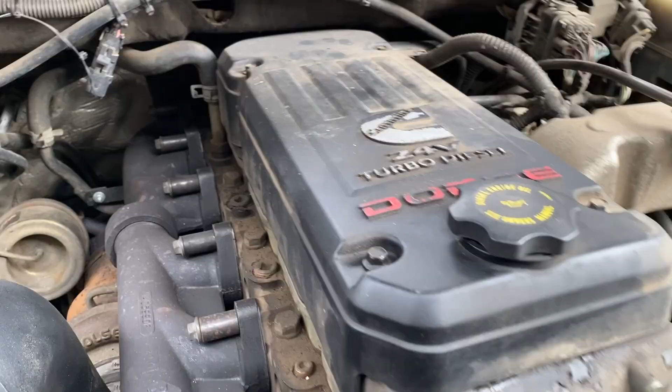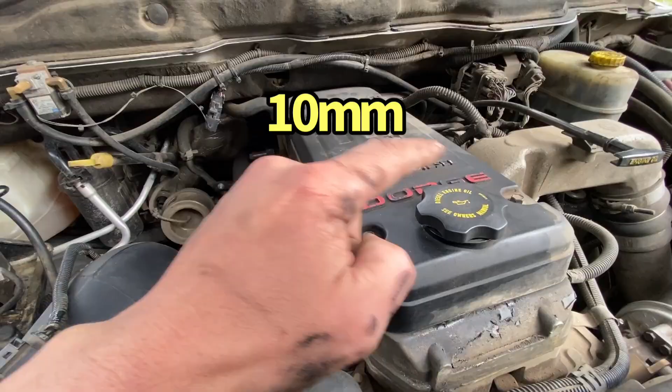But let me show you real quick. Okay, there we are. So 24 valve, like I said, 5.9, third gen. We're gonna zoom out real quick. So these are 10 millimeter bolts. You're gonna want to disconnect those. But first of all, for safety reasons, disconnect your negative battery cables.

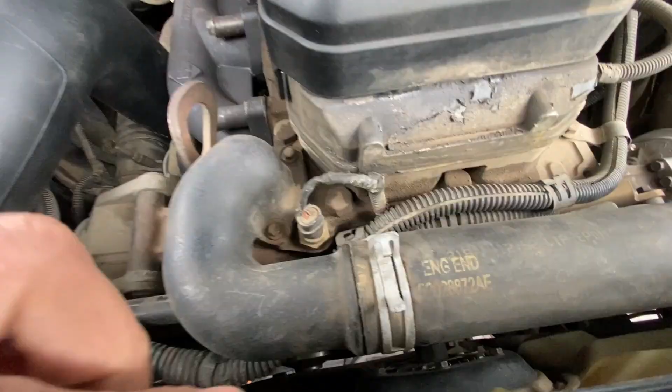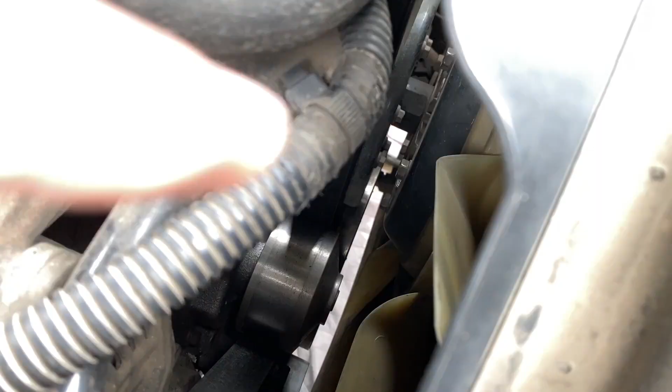And on the crank down here, I don't know if you guys can see it or not. Let's see. Maybe right through here, if it'll focus. Maybe not. Kind of a pain in the butt to see, actually. But anyway, on your crank, there's going to be a little line. Actually, kind of see it right there at the tip of my finger. Let's see if we could zoom in a little more. It's probably going to be blurry. No, it's not gonna like it. Sorry, guys.

Anyway, there's gonna be a little line on your crank pulley down there. That is gonna be the line for your TDC, your top dead center. So you're gonna want to get that at the 12 o'clock position as close as possible. And then once we remove this, I'll show you guys.

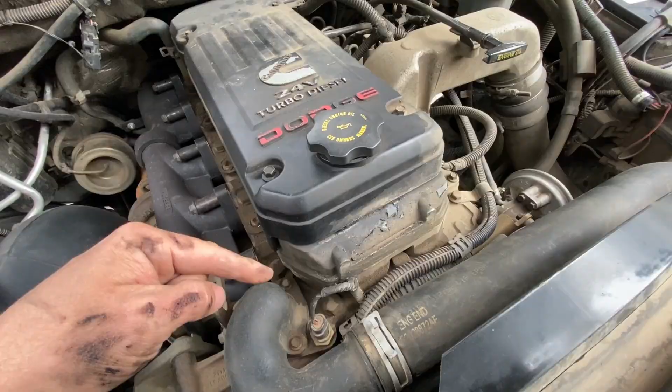So we're going to remove that, and then when you get it onto your first TDC, your first top dead center, you're going to want to check the number 1 valve, and if there's any play in it, you're on the right one. If not, if the intake valves are really, really tight, you're going to want to rotate it 360 degrees because you're already on set 2, so rotate 360 degrees, get it back on set 1, and you should have a little bit of play in those valves. So I'll show you guys that when we get it done.

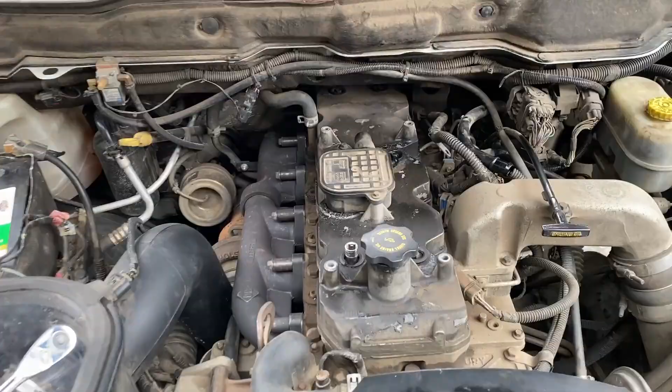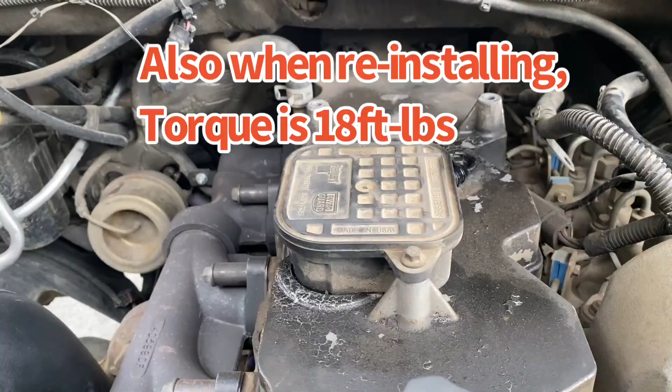Okay, so I got the cover off, you guys, and I almost got carried away. So when you go to remove the cover, be sure you take your oil cap off. These are also 10 millimeter bolts. Too much coffee. But you have 6 of those, so you're gonna remove those. Those ones are a little bit more difficult to get to than these in the open, obviously.

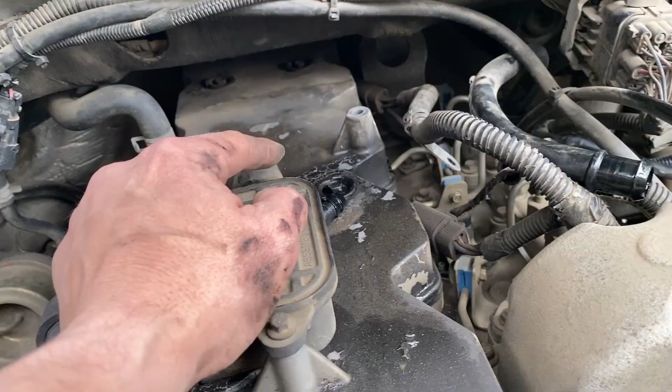And then you're gonna also want to remove this. Brain farting. Anyway, you can remove the 2 bolts on here, or you could just take the hoses out, which I have tucked away over there. I'm probably going to just wrap something on them so they don't get dirty. So this piece right here is the actual valve cover. So you're going to want to remove that. Like I said, 6 bolts, 10 millimeter.

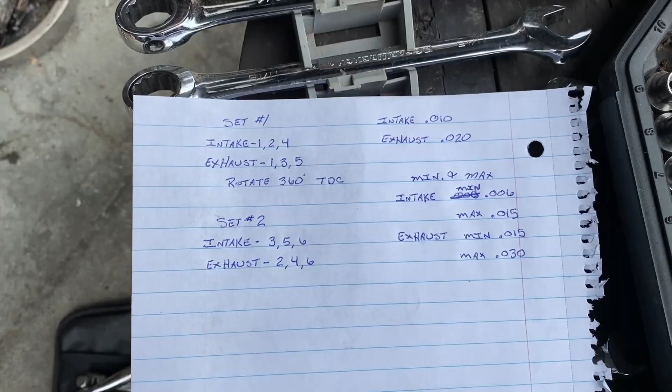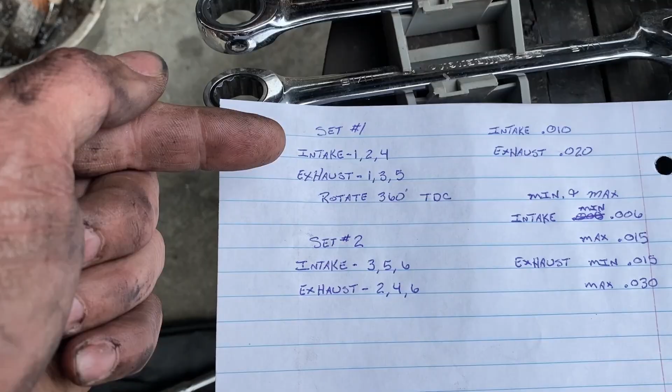Okay, you guys. So what I did is I drew this up really quick for you guys. So you have set 1, set 2. Set 1 is your TDC, your top dead center, which is that line that I was talking about earlier at the 12 o'clock position. So set 1 is going to be 1, 2, 4. Exhaust side will be 1, 3, 5. Set 2 will be 3, 5, 6 and 2, 4, 6. You guys can take a screenshot of this if you want.

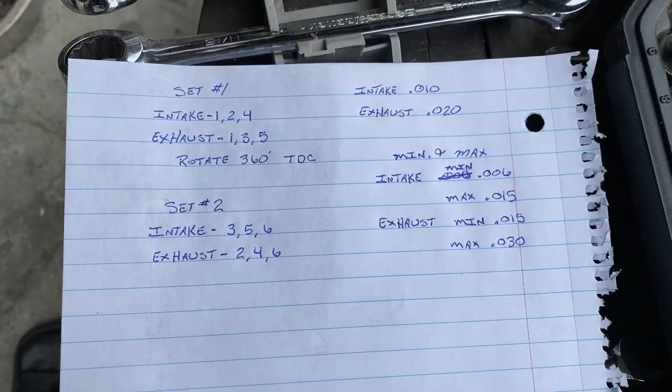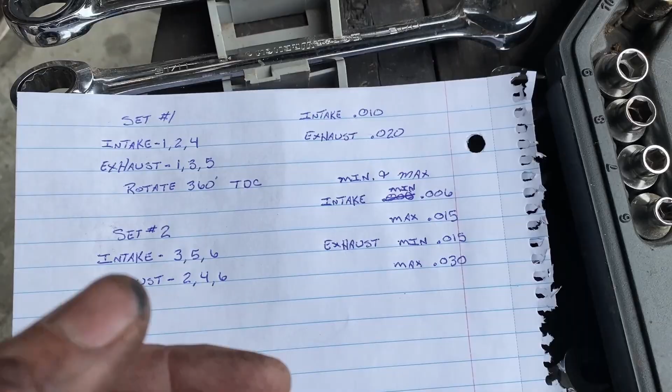So for the intake, you want 10 thou. For the exhaust it's 20 thou. Those are the recommended settings, or the lash, or the drag that you can get out of the feeler gauge. I'll show you guys that. Anyway, so you have a minimum and a max of each.

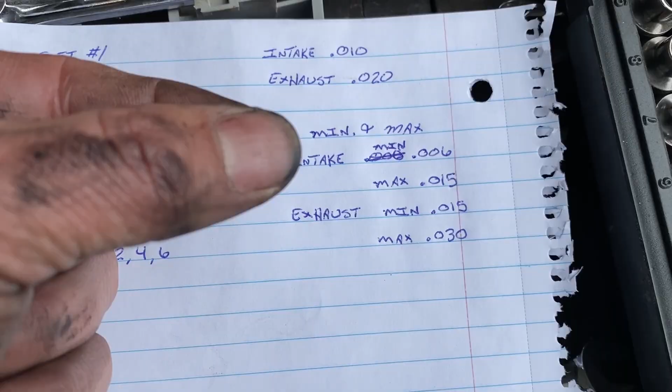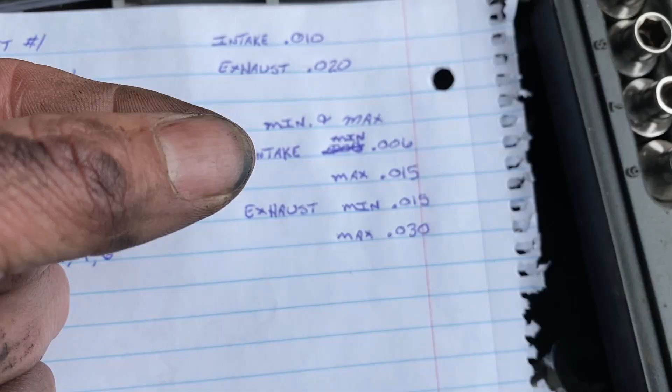There's that right there. So the minimum, the tightness, that's the max tightness. I know it's kind of weird, but so it's 6 thou. For the max looseness that you want it to be, or the amount of play, is 15 thou. So there's that. So you guys take a picture of that, and let's take a look at this really quick.

So here we are. This is what it looks like when you get the actual valve cover off. So you have all your rocker arms. You have the jam nut and the Allen key, which is going to be in the middle. The jam nut is a 14 millimeter. Zoom in a little bit.

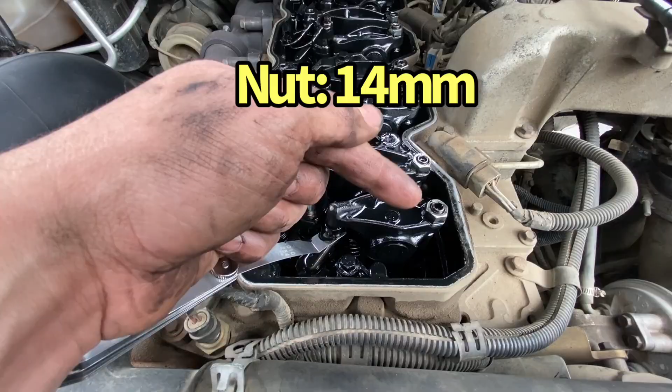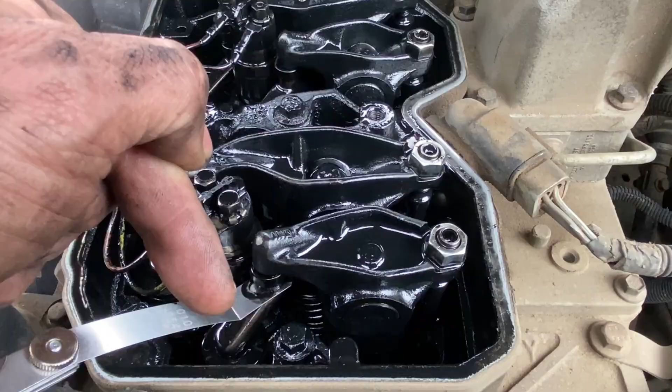So 14 millimeter. The Allen is a size 5. And so the way to adjust it is, I already put this in there because otherwise it'd be a pain in the butt with one hand. But you're going to want to just crack that loose a little bit. And I mean, it does not take much. So you're going to crack that jam nut loose, and you're going to use the Allen key, and you're going to adjust it, tighten it, or loosen it. And it's very small adjustments. It makes a huge amount of difference.

So we're on the correct set or rotation. So, I mean, it's a tiny bit. There's a little bit of drag in there, not a whole lot, but probably within tolerance. I can tell you right now, the exhaust side is very loose. Stay there. So for that exhaust side, the max or your optimal adjustment is going to be 20 thou. But I'm telling you right now, that is way out.

I deal with thousandths all the time because I build rotary engine parts, magnetos specifically. And so I deal with that stuff all the time because they're tolerances, you know. You have to have those because you can't exactly pull an old warbird with a rotary engine, well, any plane, you can't exactly stop them in the middle of the sky, pull over and adjust stuff. So tolerances are very important.

But so each one of these rockers operates 2 of the valves. Otherwise, this would be absolutely jam-packed. So the way to tell, I think my phone screen is dirty, but anyway, because somebody's going to ask, the way to tell what valves are what is you have your rockers. The ones that are closest to the intake over here are your intake valves. The ones that are closest to the exhaust over there, those are your exhaust valves. So if you look right here, you have 2 intakes, 2 exhausts, and it goes back and forth all the way down the line to cylinder number 6.

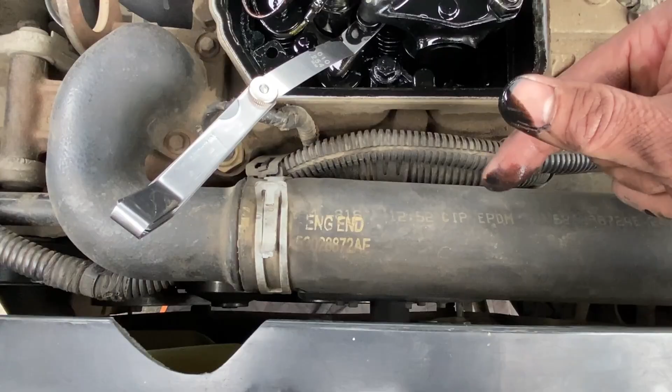You want to be sure you get these pretty within the tolerances. You don't just want to be like, that's somewhat close and call it good. That's not good for your engine, and you're going to wear out parts and have issues later on. This is not a super complicated deal. Anybody could do it, and it just takes a couple tools. There's a special tool you could put on the crank pulley to rotate it. I can list that down below. But I just reached underneath, grabbed a hold of the pulley and rotated it by hand. Just be careful because that fan's pretty sharp. It's not super difficult.

So just real quick, I want to show you guys this. That number 1 exhaust, the super sloppy one, there is 0 play in there. This feeler gauge only goes up to 26, and I put it at 26 and there was not much difference. There is 0 drag on that. Okay, so I got this exhaust one adjusted, and you can see it's a little grabby where before it was just sliding all over the place. It wasn't even touching. So it's just a little bit grabby. That's kind of what you want.

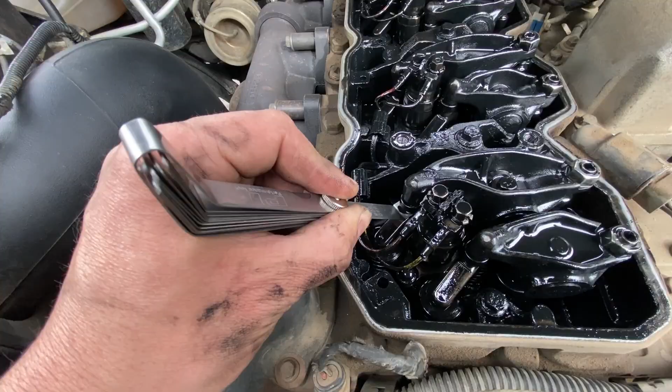Okay, so I got set 1 done. I rotated it 360 degrees and now you can see there's 0 play in 1 and 2, but there it is for set 2. 3, 5, 6, and 2, 4, 6 for the exhaust. So 1, 2, 3. See that? Now there's play. That's how you know.

There's 4. Doesn't move. There's 5. And then 6 is obviously way back there. Hopefully that's not very out. Okay, well, she's all fully adjusted. I figured I'd show you guys this. A lot of people don't get to see this, but you can do this. So they're all fully adjusted.

So when you start the engine, oil comes up through here and it fills these and it spills over. And that's how you get it. It takes approximately 5 to 8 seconds, depending. Like I said, it depends upon the viscosity, the weight of the oil, how quickly the oil comes up.

So I know a guy who went through two 7.3 Power Stroke engines. Well, he wasn't the sharpest tool in the shed. On cold days, I literally watched him repeatedly, 5 days a week. As soon as the engine would crank over, he'd drop it into drive and take off. Not good. That's why he went through so many engines, especially those 7.3s. Good engine.